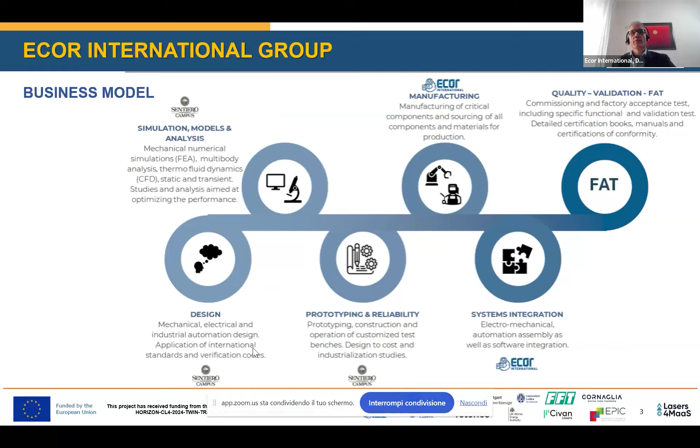The business areas, as explained before, are mainly four. Here you can see the first three that are connected with the manufacturing of components. We are a service company, so we do not have our own products, but we produce products according to the specification and requirements of our customers.

Some examples just to understand what we produce in different fields, and to understand how we have a really diversified market where we are able to supply different components with different qualities. We started from single components up to subsystems, for instance in the field of food packaging industry, rather than structural or other types of components like pipes having different functions in the field of aerospace and defense, and really great diversification also in advanced mechanics and pharma sector.

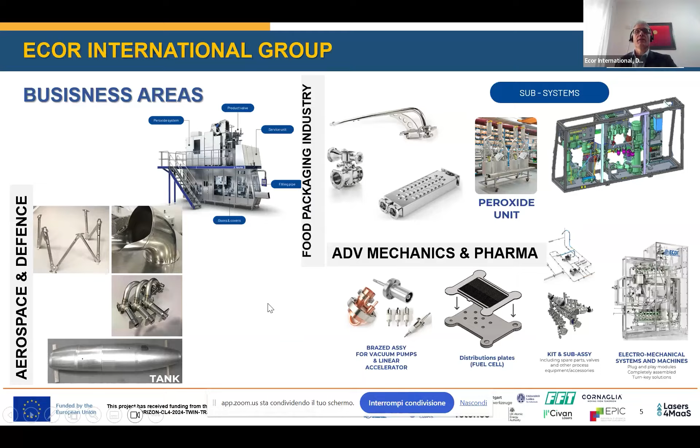As explained before, research and development for us is not only a cost but really a business area. For this reason we have a research company dedicated only to industrial research, supporting mainly the customer and only a little bit ECOR International. The turnover is more or less 8.4 million euro for last year, and we have 56 persons dedicated to industrial research.

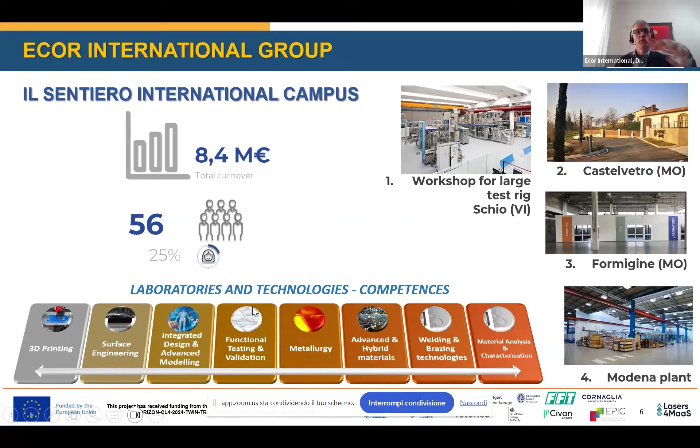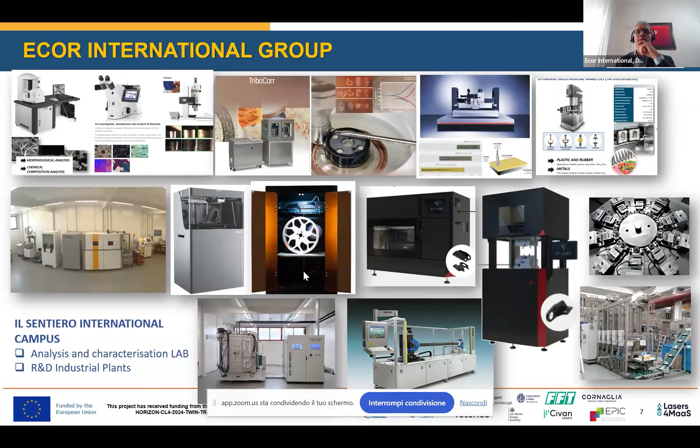The competencies vary from 3D printing to functional design, surface engineering, metallurgy, welding, brazing technology, and so on. All the plants dedicated to industrial research are industrial plants, because we aim to supply our customers with high TRL results ready to be used for the specific aims that they require.

Let's start to speak about market technology. I would like to show you how the Lasers4MaaS process is a project that is really well integrated in the industrial area, how it aims to impact at the industrial level from the point of view of different markets, and also in the automotive or e-mobility sector.

This is a brief picture about our business strategy, supported and useful to be considered by the Ansoff matrix. The matrix lies on four distinct growth strategies, each defined by a unique combination of products and markets, which could be existing or new.

If we look at market penetration, this means we make leverage on the company's established strengths and market knowledge in order to increase the existing markets. An example could be the improvement of product quality or features to encourage repeated purchase. From this point of view, the development or introduction inside the company of innovative and advanced technologies can be an answer to this first market penetration.

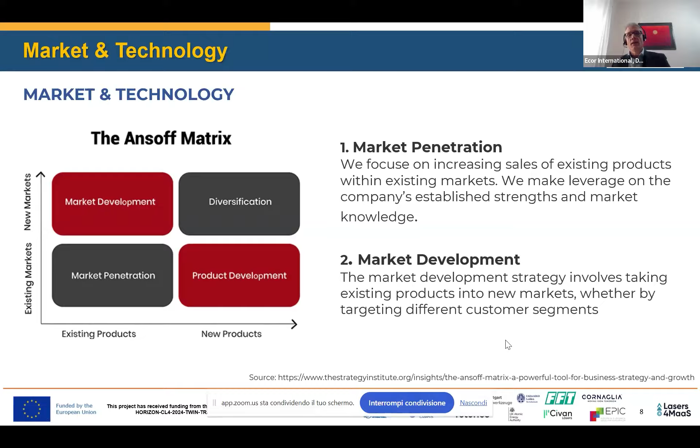But at the same time, we also have market development. That means a strategy that involves existing products being introduced in new markets, or by different actions, considering for instance different customer segments.

Product development is correlated to the research business area because it's connected to investment in research and development for opportunities in innovation, the creation of new products according to our customer needs. Important here are customer feedback and collaboration with key stakeholders. Last but not least, diversification means expanding into new markets or products related to our existing business, allowing potential synergies in terms of resources, capabilities, or customer specification.

Here we go deeper into the project, understanding the concept of market consolidation and expansion in two fields we already work in: pharma, and fuel cell, where we already produce using laser technologies. We can see how we move from these two markets, where we aim to expand the business, to reach another market that is a green field: e-mobility.

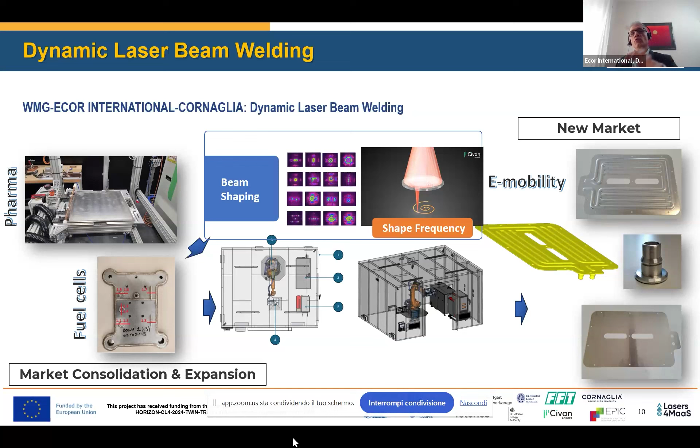The approach is to deploy competencies in terms of knowledge, technological experience, advanced technologies, and also another project partner already working in the automotive field. All these experiences - industrial, academic, and other scientific and technical experience - can be joined together to develop an integrated technology, a manufacturing and service platform able to reach this specific target.

We have seen the complexity of the parts that we produce. We have a great number of geometries, a great number of part numbers, and different thicknesses of sheets that we use to manufacture the different components. We have different precision constraints and so on.

Of course, all these variables impact on laser requirements. So the market needs, the end user needs, and the technology needs really have different effects on what is necessary, what is required from the point of view of the end user for laser process and equipment.

I would like to stress that the main characteristics cannot be considered as alternatives or standalone, because laser technology needs to be considered as a whole set of features of modern advanced technology to be collected together. So easy configurability and reliable performance are mandatory for this field.

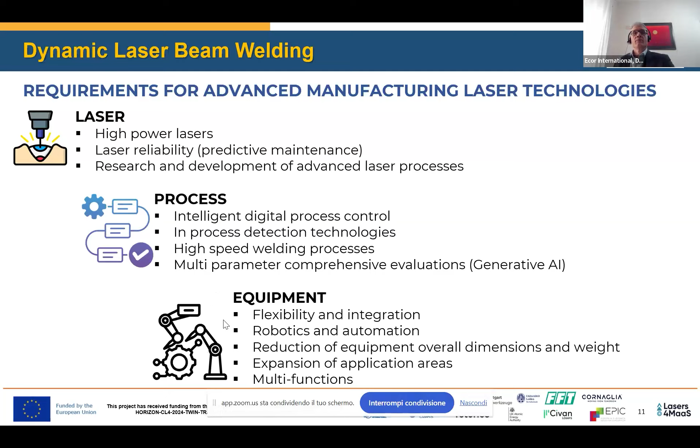Now, here you can see something correlated with business and technological diversification through innovation. Diversification and innovation are essential for building resilience in times of economic uncertainty.

We see every day there is something that introduces a new variable in the market. By exploring new markets, developing new products and services, partnering with other businesses, investing in R&D, or embracing new technology, the business can reduce risk and increase the chance of long-term success.

Technological diversification can help organizations mitigate the risk associated with relying heavily on a single technology or market. By spreading investment across multiple advanced technologies, a company can reduce its vulnerability to disruption or shifts in customer preferences.

In today's rapidly evolving business landscape, enterprises face the dual challenge of maintaining competitiveness in existing markets while exploring ways for growth and expansion. Traditional strategies for diversification often rely on geographic expansion, for instance, or product line extension, mergers, acquisitions, and so on.

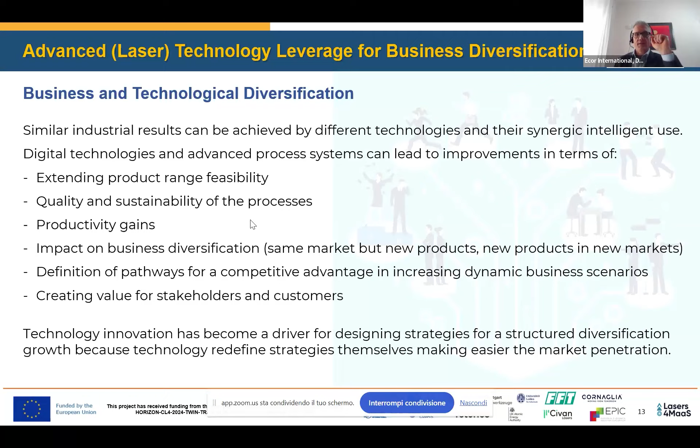The Lasers4MaaS Process project represents a fully collaborative approach from this point of view, with transversal industrial objectives, aiming to bridge the gap between research and industrial practice.

From our point of view, to adapt to changing market dynamics, businesses should prioritize continuous learning and development. So inside the project, we think we can find suitable answers to these needs, from our point of view.